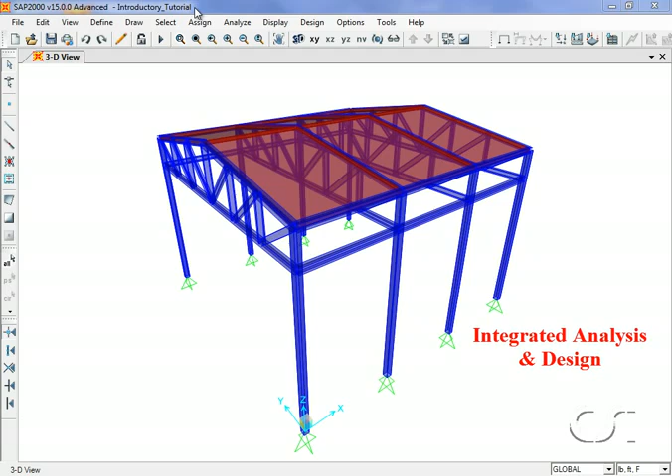Welcome to SAP2000, a comprehensive, yet easy to use, state-of-the-art finite element analysis and design package. In this tutorial, we will create a simple industrial building framed with steel wide flange trusses supported by tube columns, with a concrete roof.

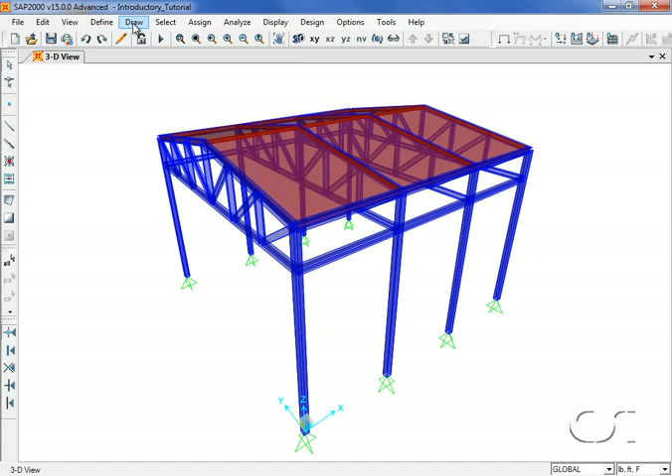Before we get started with modeling, let's take a quick look at the SAP2000 interface. All of the options are available through the top menu bar. Toolbars offer buttons that provide access to commonly used commands, including snaps, zooms, and views. An icon next to a menu command indicates that this item is also available as a one-click button.

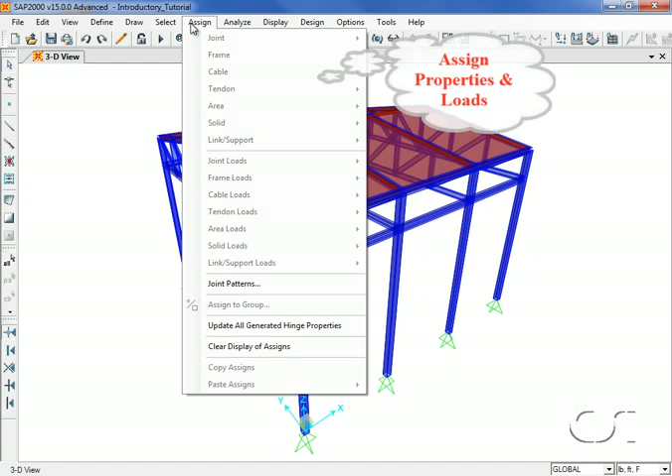Typically, one defines materials and section properties, draws the physical objects, selects the objects, and assigns properties and loads to the objects. The model is then analyzed, followed by design if so desired.

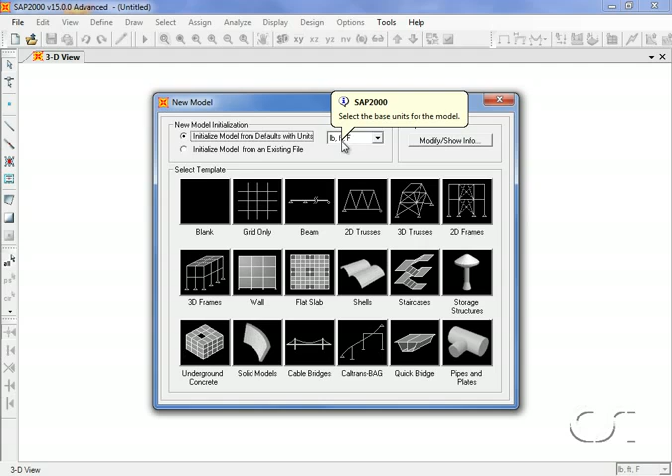We start the process by clicking on File, New Model. Make sure that the default units are set to pound-feet. These are our default units, but any other units may be used while creating the model. SAP2000 offers a wide range of parametric-based templates to help create your models, including 2D and 3D frames that could be used for our building.

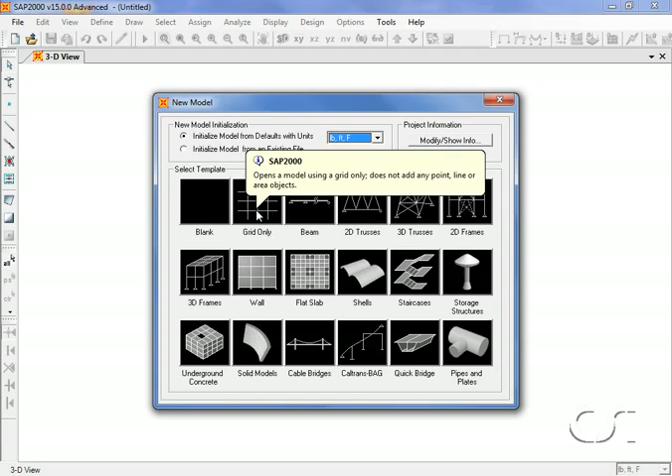However, we will start by using only a grid definition. A thoughtfully planned grid system can result in enormous time savings, so spend some time at the start to make sure your grid captures the main geometrical features of your structure.

Clicking on the grid button, we can now input the number of grid lines, followed by the spacing values. Note that by explicitly specifying the units, we can enter these values in units other than the defaults, and the program automatically handles the conversion.

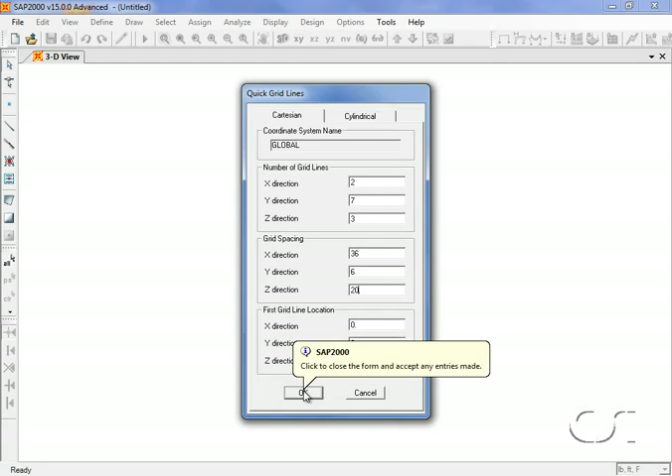The grids appear in two view windows: an XY plan on the left and a 3D view on the right. The number of windows may be changed by using the controls in the top right corner.

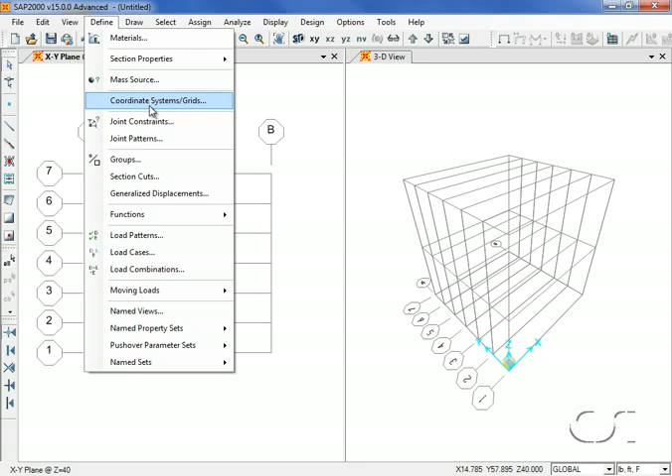Next, we will adjust the height of one of the Z grids. Click the Define Coordinate Systems Grids command, and then the Modify Show System button. In the Z grid data area, enter 24 for the ordinate of the Z3 grid, and then click OK. We have shortened the upper grid spacing.

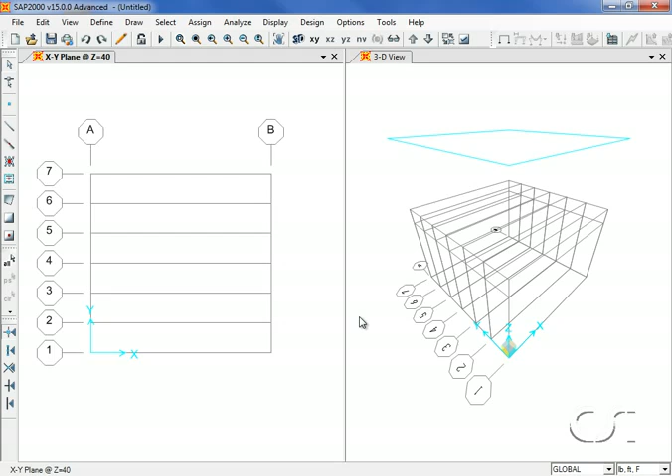Next, we will define the material properties to be used in the model. Click the Define Materials command, and note that two materials are predefined, one for concrete and one for steel. These are appropriate for the concrete roof deck and the wide flange sections, respectively.

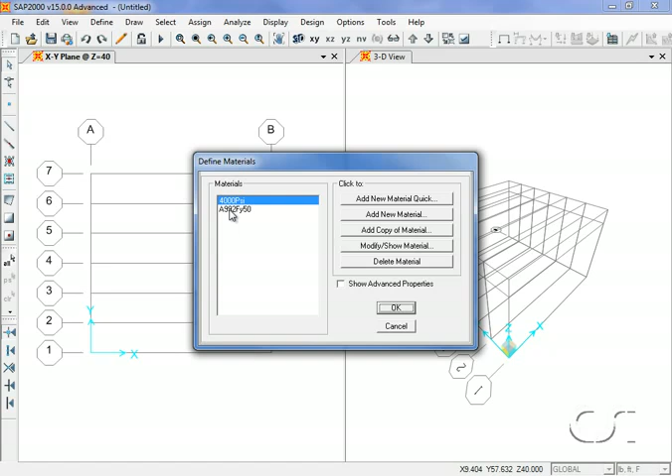We will add a third material property for the steel tube columns. Click the Add New Material Quick button and select Steel from the Material Type drop-down list, and then ASTM A500 Grade B from the specification list. This is all we need to do to define a material when selecting from the predefined standards.

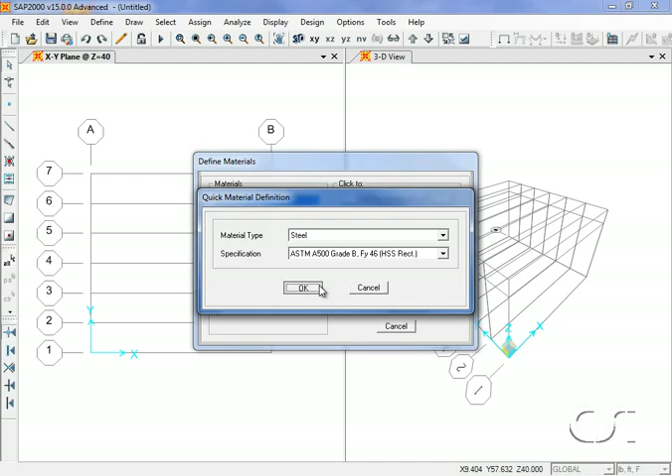Next, we will define the frame section needed for the column objects by clicking on the Define Frame Sections command, and then clicking on the Import New Property button. Verify that steel is showing in the property type list, and then click on the Tube button.

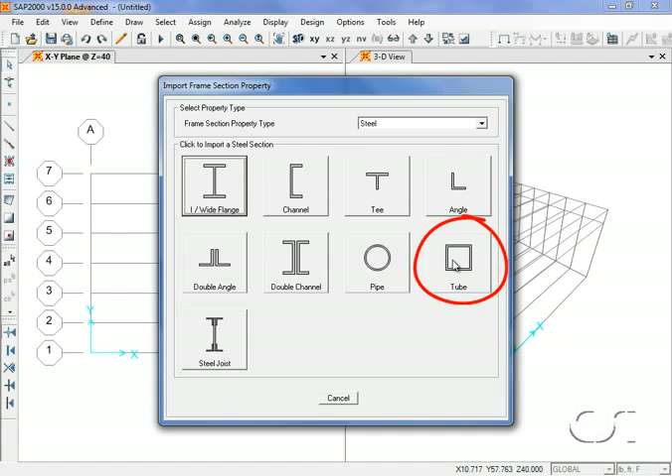Next, we will select and open the section database and select A500 Grade B46 from the material list. Clicking on the plus button allows editing of the material or additional materials to be added. Scroll down the list until you locate the HSS 8x8x3/8 section.

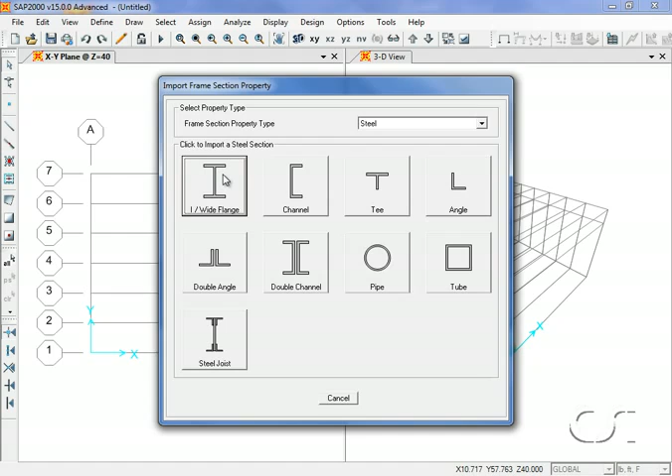Leaving the Frame Properties form open, we will next define the wide flange section properties needed for the trusses. Click the Import New Property button, and this time select the I Wide Flange button. Verify that the A992FY50 material is showing, and scroll down the list until you find the W8x10.

Continue to scroll until you reach the W8x67 section, and select the entire group by holding down the Shift key and the left mouse button simultaneously.

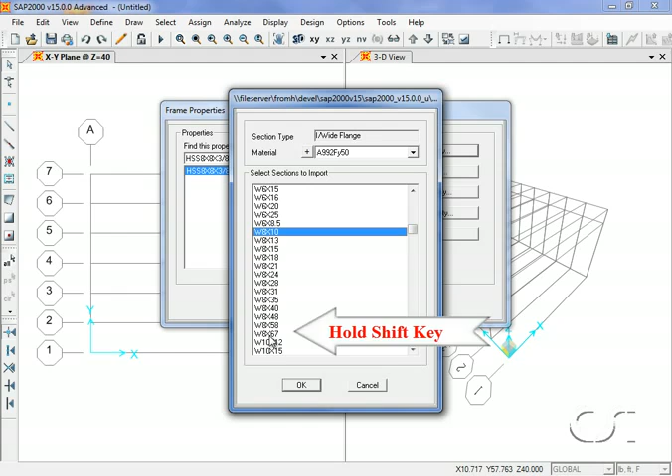Now that these wide flange sections are available to the program, we are going to assign them to an auto-select sections list. This list will tell the program to choose from these sections when analyzing and designing the trusses.

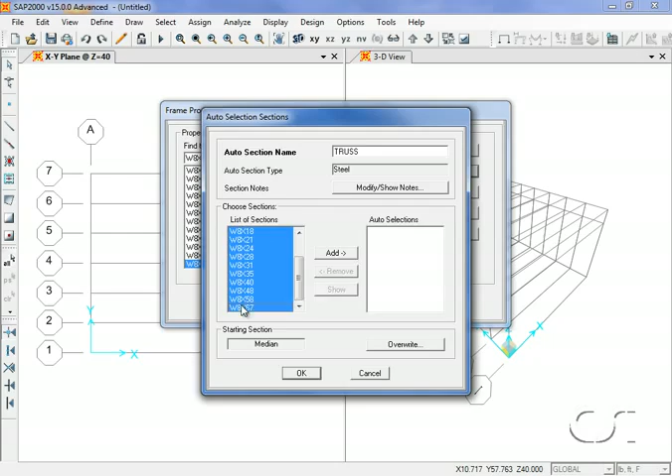Name the list Truss and select all of the wide flanges. The program will use the median section as the starting section in the initial analysis. We can now assign the truss list just like we would an individual section.

Make sure that the left view or XY plan view is active. You can make a view active by clicking anywhere in the window, and you can verify that it is active if the title tab is highlighted.

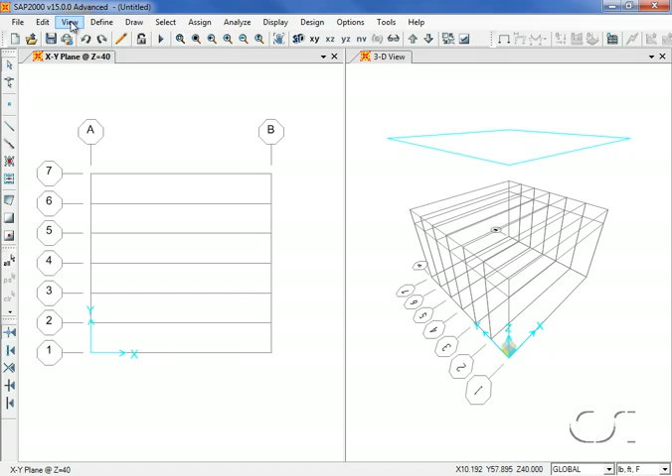Next, click the View menu, Set 2D View command. Select the YZ plane option with X equal to 0 and click OK. This changes the view to a YZ elevation.

Next, make sure that the Snap to Points option is on and click on the Draw Frame icon.

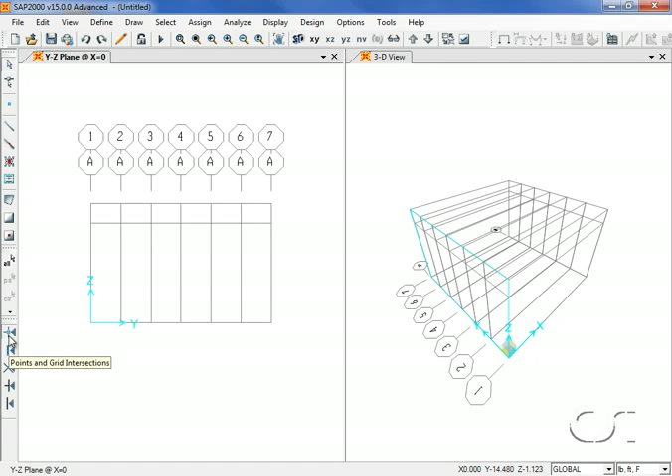We are going to draw the column objects and want the program to assign the HSS 8x8x3/8 sections to the objects. Start by clicking at the origin and then click again at the top of the grid to give a column 24 feet tall. Note that the position of the cursor is given in the lower right-hand corner.

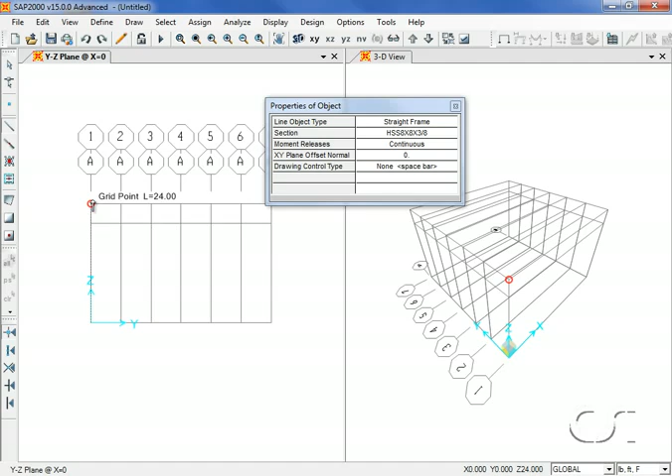A right click will stop the drawing action but leave you in the draw mode. We will repeat the process on the other side to draw another column.

Right-click and return to the Properties of Object form and select Truss from the Section drop-down list. This will assign the Truss Auto-Select list to the truss members we will now draw.

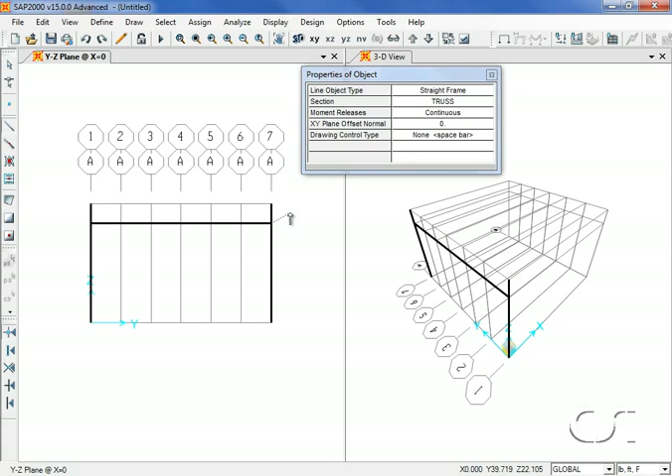We will start by drawing the bottom chord. Note that this chord is drawn as a single physical member. Repeat the process to draw the top chord, which will also be 36 feet long. Next, we will draw the diagonals.

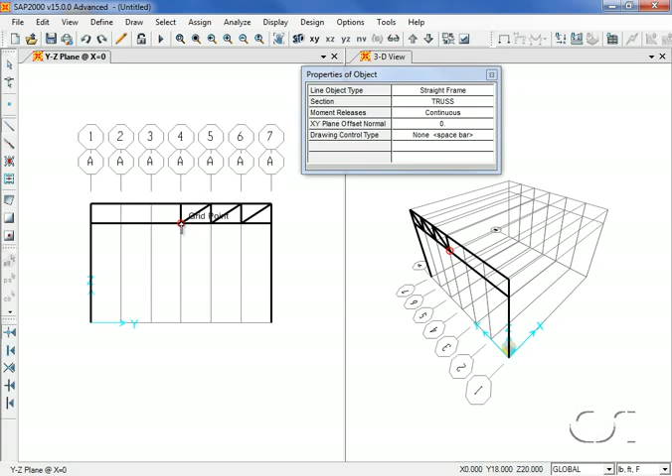After drawing one half, click the right mouse button and continue by drawing the other half. Click the Set Select Mode button to leave the draw mode.

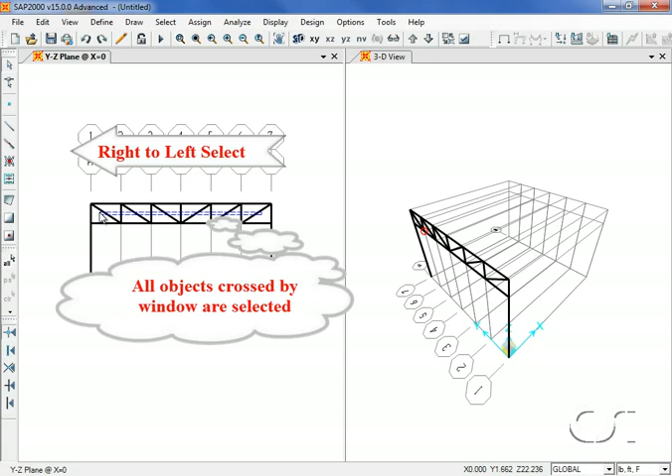Next, we will assign pinned releases to the internal truss members. Select all of the internal diagonal and vertical members by holding down the mouse button and dragging the cursor across the objects right to left. As a general note, when in selection mode, if you window from right to left, everything touched by the window will be selected. However, if you window from left to right, only items completely within the window will be selected.

Click the Assign Frame Releases command and check the start and end boxes for the Moment 3-3 component.

Click the Assign Clear Display of Assigns command to remove the pinned identifiers.

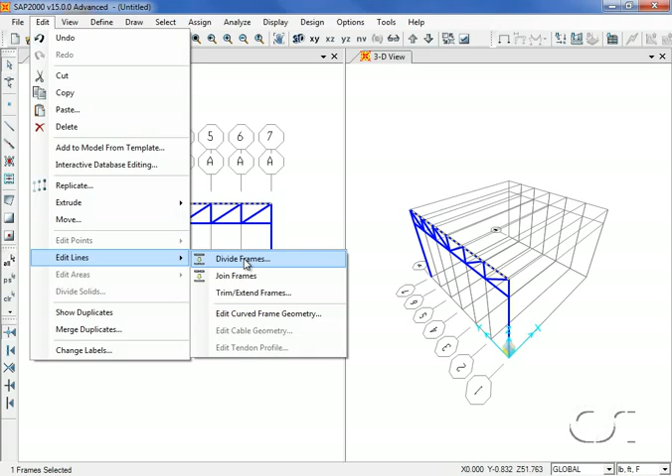Next, select the top chord by clicking on it and go to the Edit, Lines, Divide Frames command to divide the single object into 2 frames. This will allow us to later alter the slope of the top chord.

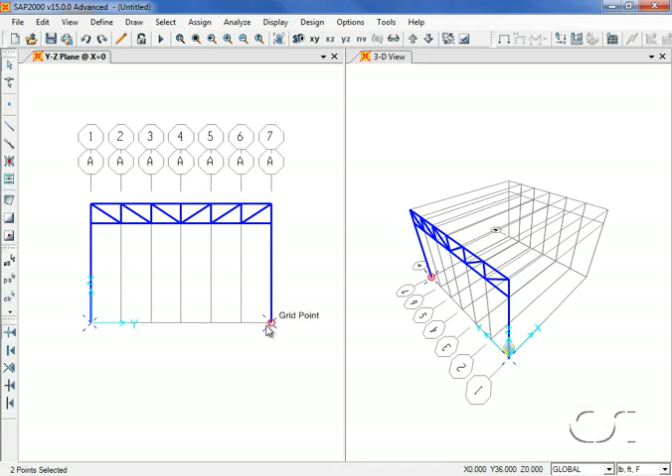In this step, we will define the supports for the columns. We click on the 2 joints that define the bottom of the columns, and then go to the Assign Joint Restraints command. We are going to pin the column supports.

Next, we will replicate the truss frame just drawn at other locations in our model. Click the Select All button to select all objects in the model.

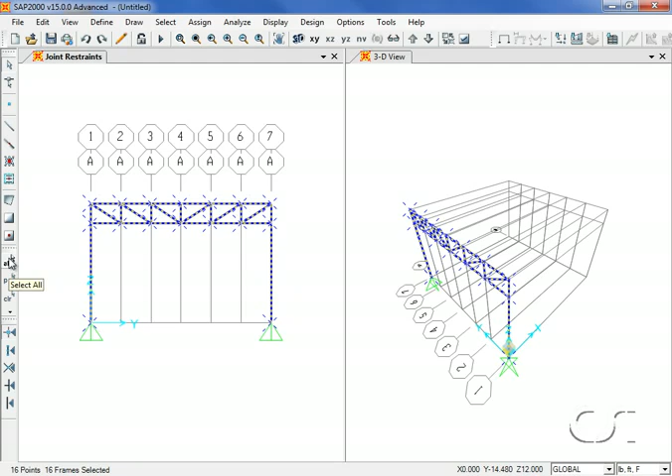Click the Edit Replicate command, enter 12 into the DX edit box, and 3 into the number edit box to replicate the frame at 3 locations at 12 feet on center.

We will next change our view to an XZ planar view so that we can draw longitudinal beam members.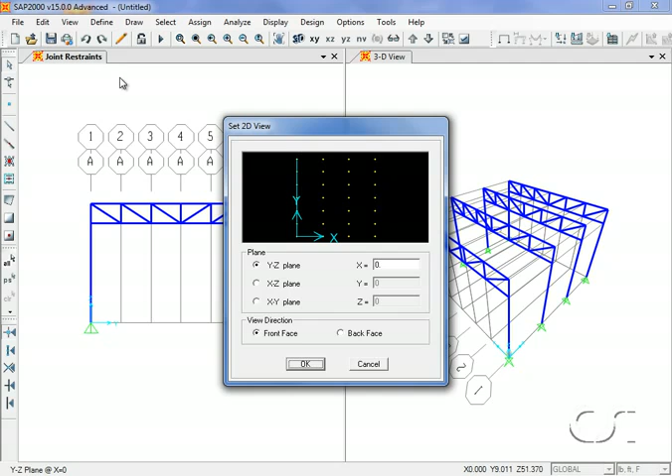We go to the Draw Frame command and select the W8x31 section from the section list. Our first member will be drawn along the top of the frame.

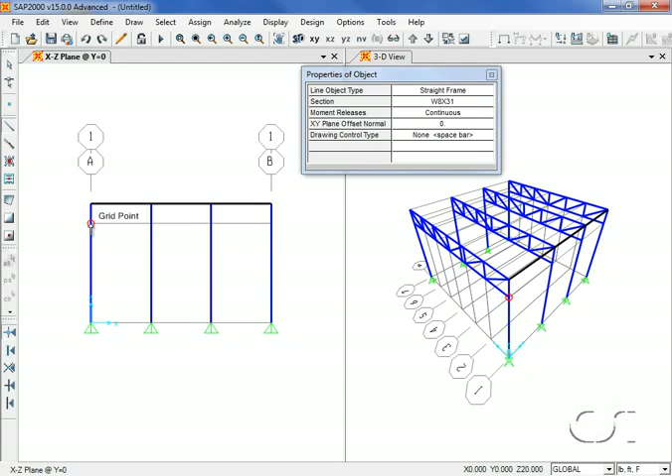We will add another frame object at the next grid level down. Leave the draw mode by clicking on the Set Select Mode button and select the 2 objects just drawn by clicking on them, remembering that they were drawn as single objects.

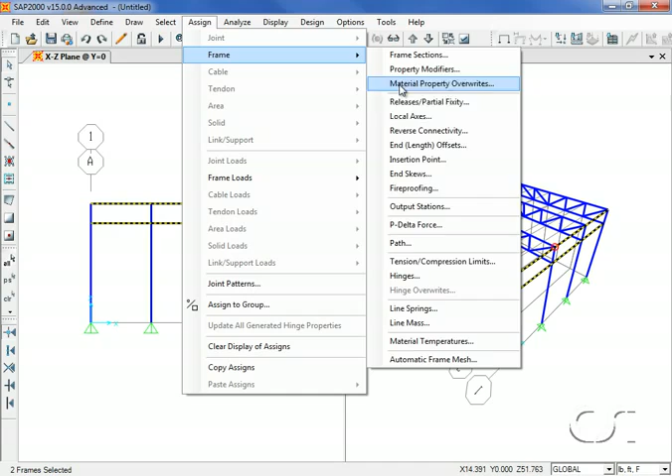This next step will tell the program to internally mesh these members so that they will be connected to all of the elements that frame into them.

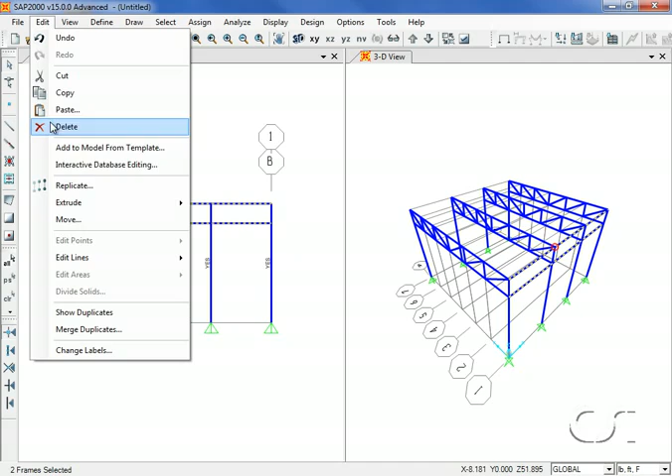Next, we will replicate the beams just drawn at the other side of the building. Select the beams and go to the Edit Replicate command, and set DX equal to 0, DY equal to 36, and the number equal to 1.

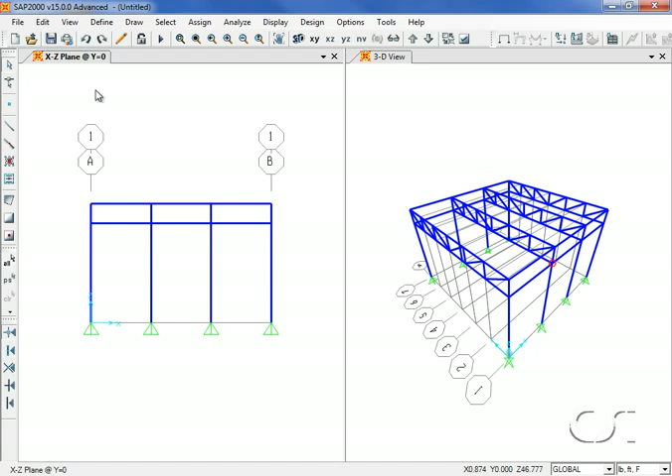Next, we will add the concrete roof deck into the model. Change the left window to an XY plane at Z equal to 24.

And define the concrete deck by going to the Define Area Sections command.

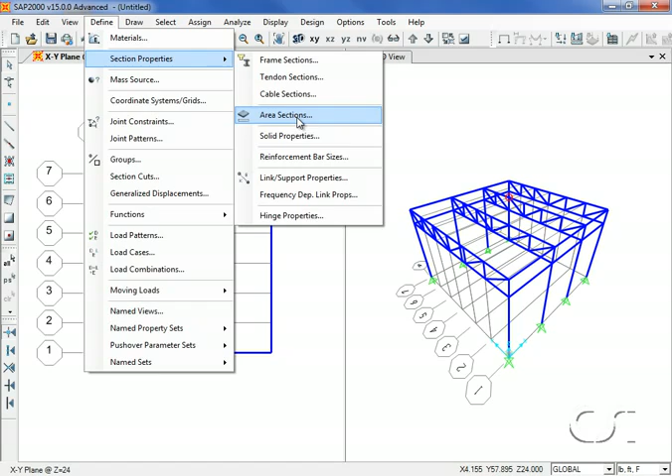We will create a new section called Roof, which will use the default 4000 psi concrete with a thickness set to 5 inches. Notice that by explicitly inputting the units, the program can automatically convert these to the base units of feet.

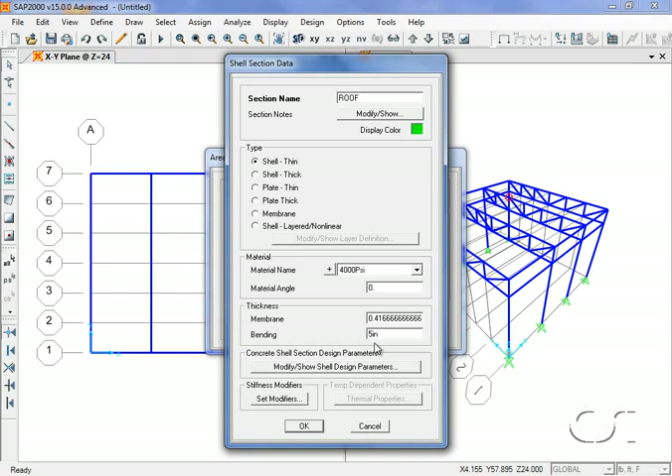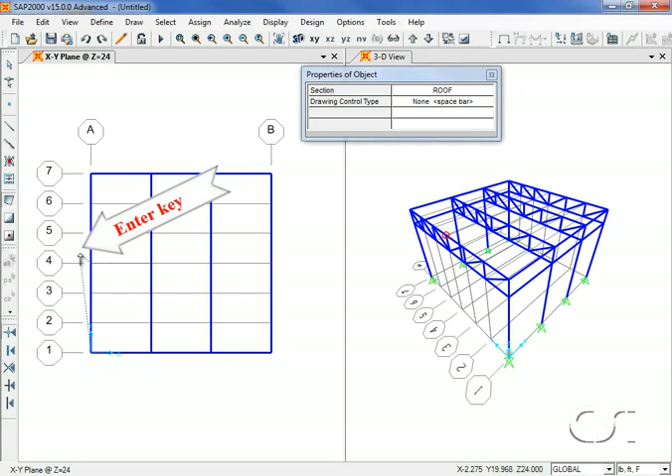Next, draw one of the deck panels by using the Draw Poly Area command. Make sure that the property is set to roof, and then click on the 4 corner points followed by the enter key to define the first roof panel.

Leave the draw mode and click the Set Display Options button. Check the Fill Objects box and the Apply to All Windows box.

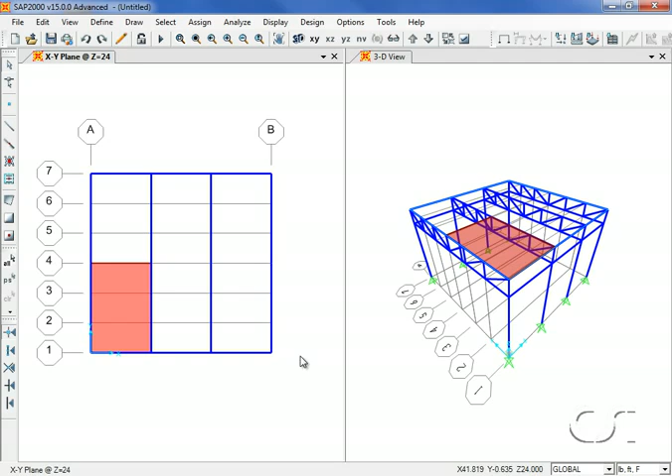To make the model easier to see, we will turn off the grids in the 3D view.

Next, we will mesh the roof panel to ensure connectivity with the supporting frame members. Right-click anywhere on the roof deck to display the Area Information form. Object assignments and loads may be edited directly from this form.

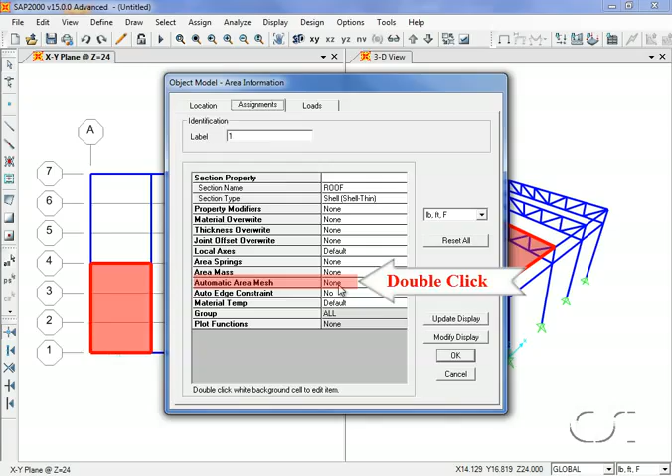Double-click in the Automatic Area Mesh Edit box, and then select the Mesh Area based on Points on Area Edges option. And check the intersections of straight line objects and the Point Objects checkbox.

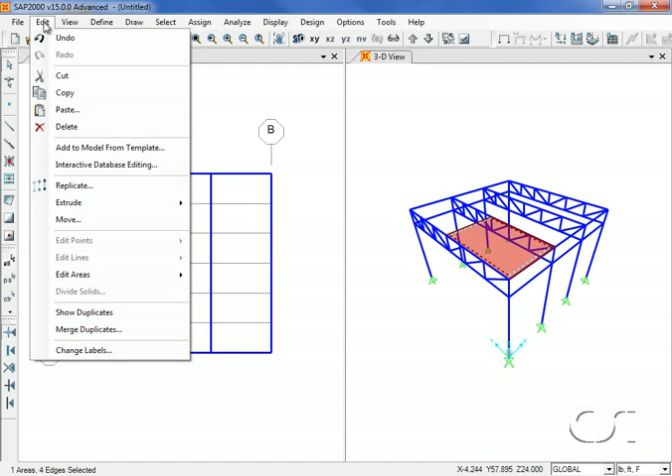Next, we will replicate the roof panel to fill the entire roof area. Select the roof panel by left-clicking on it and note that the selection is shown in the lower left-hand corner. Then go to the Edit, Replicate command. On the Linear tab, type 12 into the DX edit box and 2 into the number box.

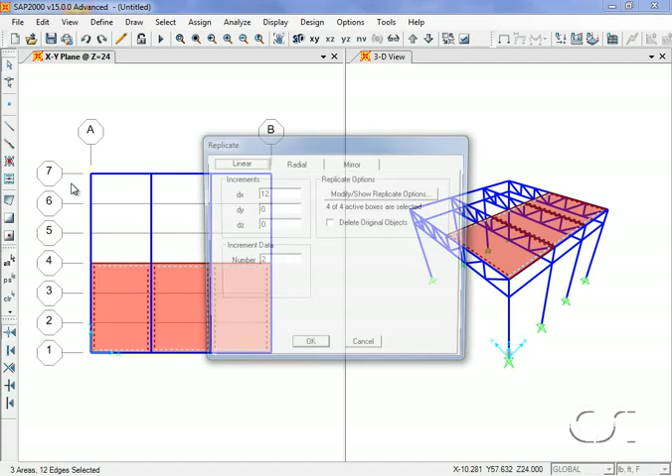Now we select all 3 roof panels and will replicate to the other half of the roof. Next, we will move the roof objects to create the roof slope.

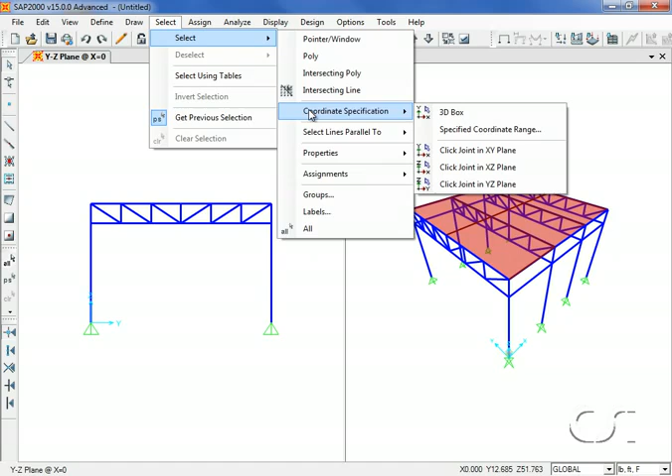We go to the Select, Specified Coordinate Range command, and click the At a Single Value option under the Y coordinate limits. With the operator set to equal, we enter 18 into the value edit box. In the Z coordinate limits area, again select the At a Single Value option, but this time type 24 into the value edit box.

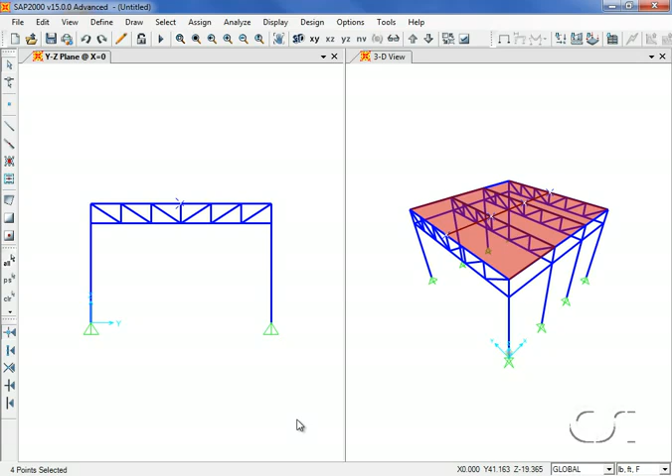This command will select all point objects that lie along the ridge line of the roof. We will move these selected points vertically 3 feet in the up direction. Note that the roof panels have moved up appropriately, but the truss diagonals and verticals need adjustment.

Returning to the Specified Coordinate Range form, we select the Between Two Values option under the Y coordinate limits. For the first operator, we use greater than and set the value to 12. For the second, we use less than and set the value to 24. For these selected joints, we will move them up 2 feet.

For the last truss points, we use values of 6 and 30. These points will be moved up 1 foot.

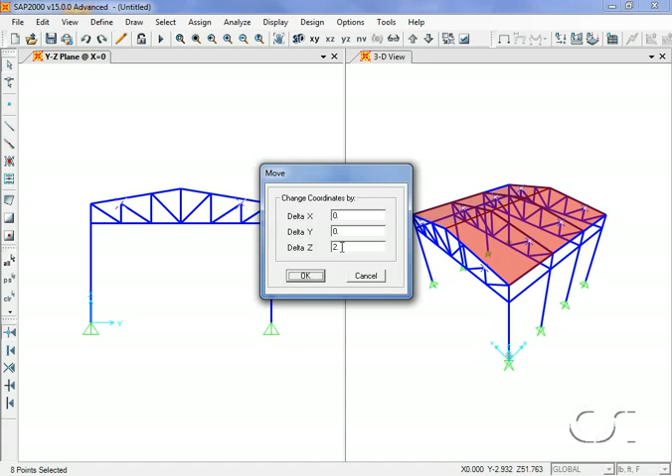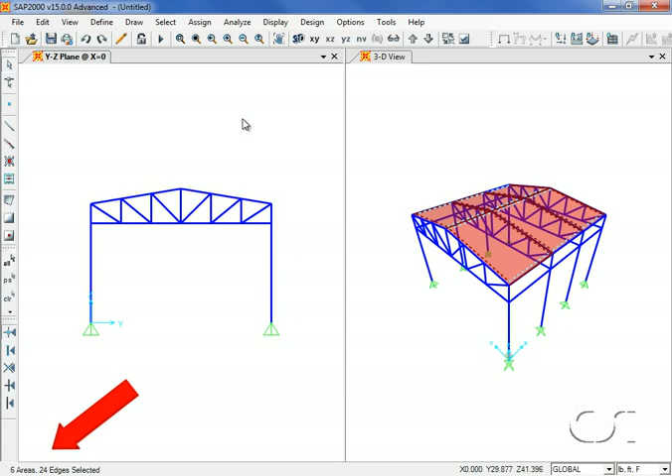Next, we will modify the stiffness factors of the roof area objects so that they will not act as flanges for the top chords of the trusses. Selecting all the concrete roof panels by their material property, we go to the Area Stiffness Modifiers command and enter 0 into the membrane F22 modifier edit box. This prohibits in-plane axial loads.

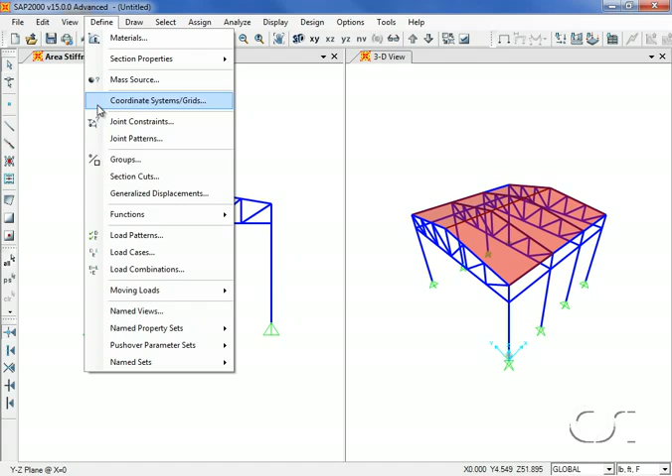A check of the default load patterns shows that we have one pattern, dead load, with self-weight included. We will now add load patterns for live load and wind load.

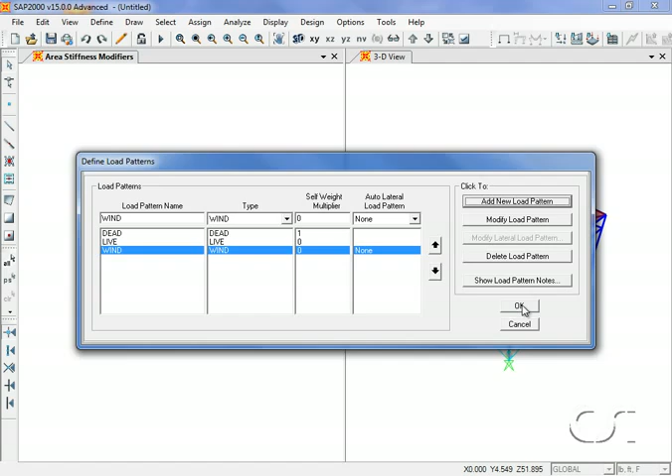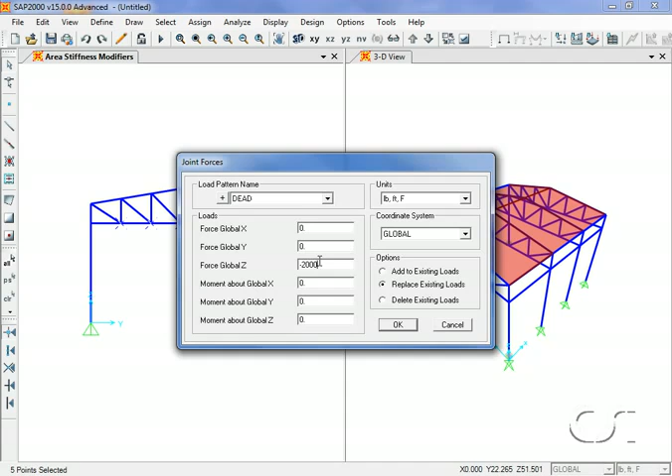Now we will assign loads. Start by selecting the panel points along the bottom chord and go to the Assign, Joint Loads, Forces command. For the dead load pattern, we will apply joint loads of 2000 pounds in the down, or -Z, direction. These are in addition to the self-weight of the structure.

Repeat the selection process using the Get Previous Selection button, and replicate the load at the other trusses.

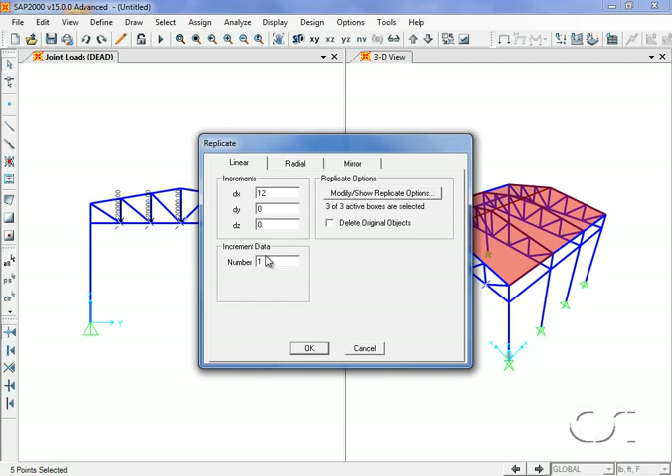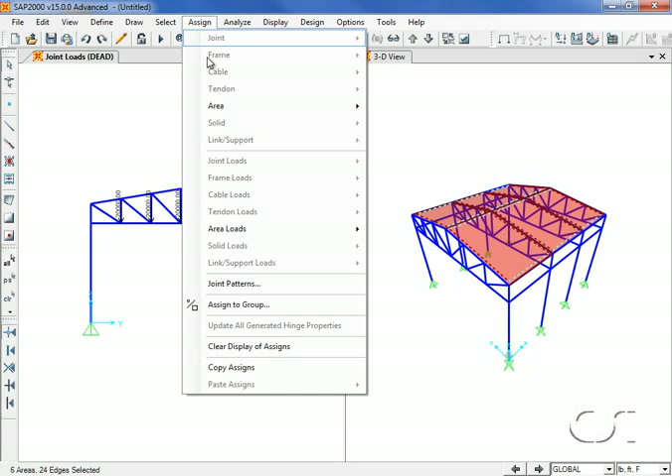Next, we will apply a live load to the roof panels. Select the roof area objects by section property and go to the Assign, Area Loads, Uniform command. Here, we will input a uniform live load of 30 pounds per square foot in the gravity projected direction.

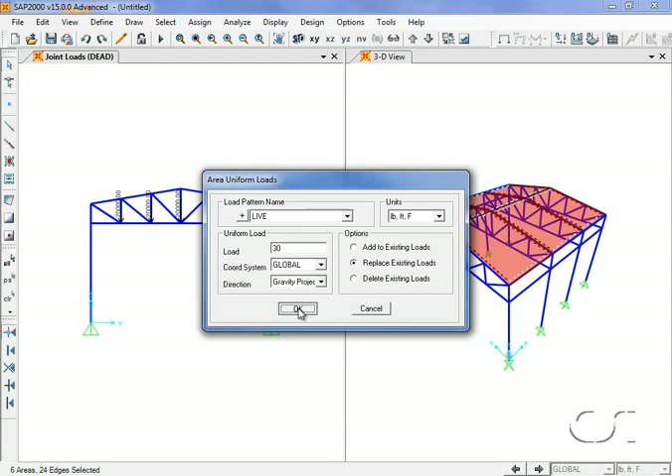Next, we will apply wind loads. Different loads will be applied on the windward and leeward sides of the roof. We will start with the windward load and select the roof area objects using the Specified Coordinate Range command. We uncheck all the options except for area.

The load will be applied as a surface pressure of 15 pounds per square foot to the top face.

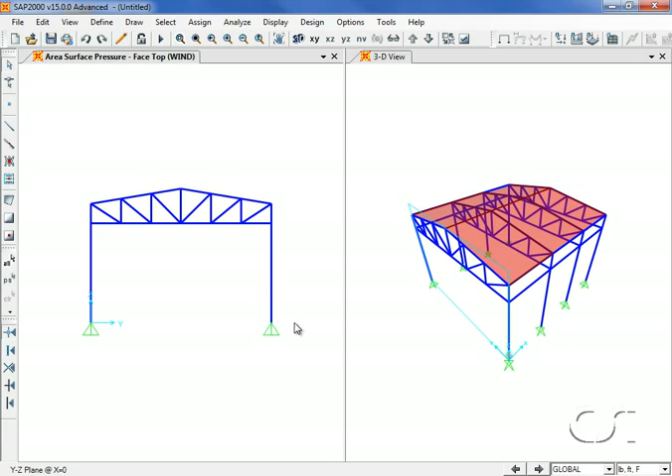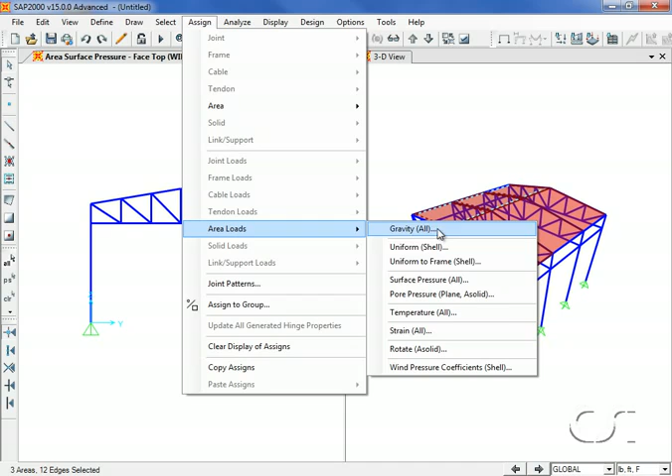Now we will select the area objects on the other side of the roof and assign a surface pressure of -6 pounds per square foot. This results in an outward pressure on the leeward side.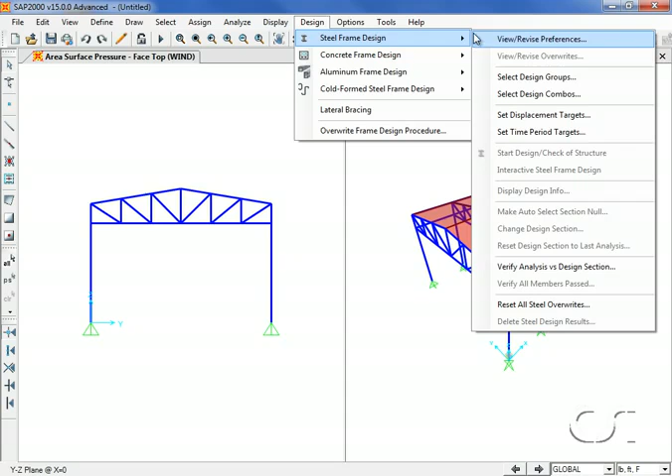Next, we will select a design code and set up load combinations. We will use the AISC 360-05 design code for our steel members. For the combinations, we will let the program automatically generate our combos based on the selected AISC code.

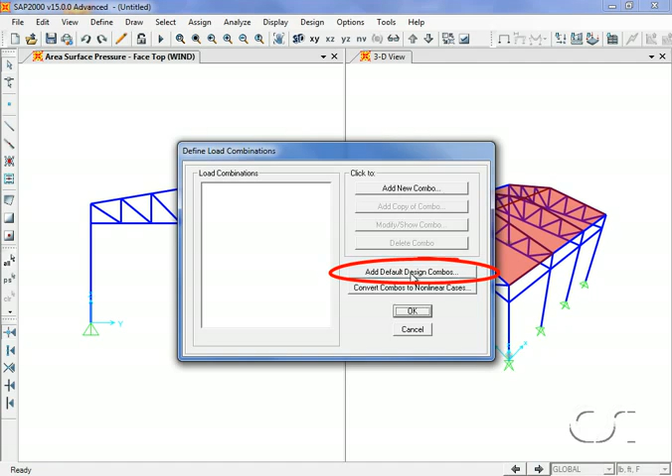Clicking the Add Default Design Combos button, we will uncheck the deflection checkbox. For this model, we are concerned only with strength limit states.

Note that 6 load combinations have now been generated. We can review these by selecting and clicking the Modify Show button.

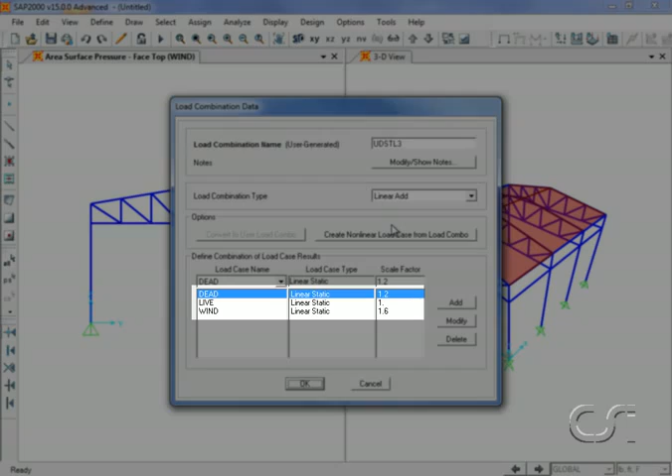Note that the third combination is 1.2 dead plus live plus 1.6 wind, while the fourth is the same, but with wind applied with a negative factor.

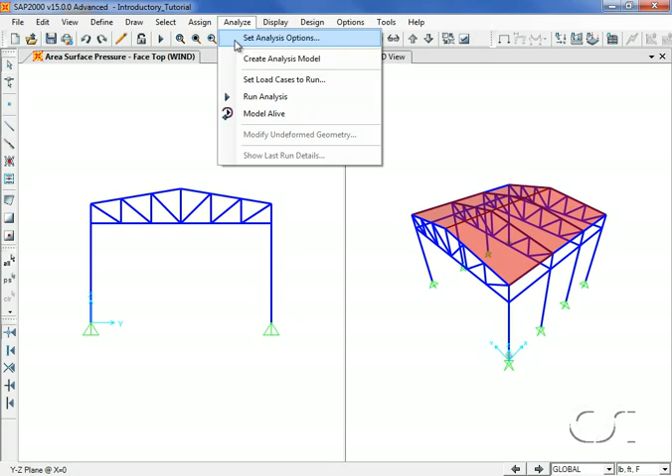The model is now complete and we are ready to analyze the model. Click on the Analyze Run Analysis command and set the modal case to Do Not Run, as we wish to do a static analysis only.

Click on the Run Now button. After the analysis is complete, the active window is updated with the deformed shape.

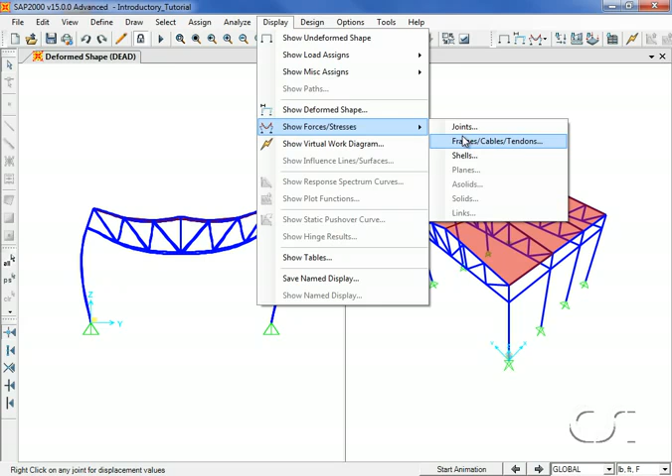Make sure the left window is active and click on the Display Show Forces command and select Frames. Here you can choose the load case and type of force to be displayed. A right mouse click on an individual member will bring up detailed force diagrams for that particular member.

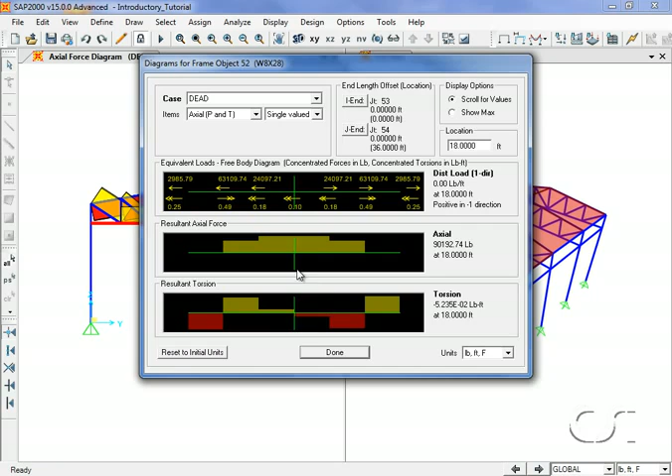Next, click on the Display Show Deformed Shape command. Similar to the forces, a right mouse click on a joint will display the displacements for that particular location.

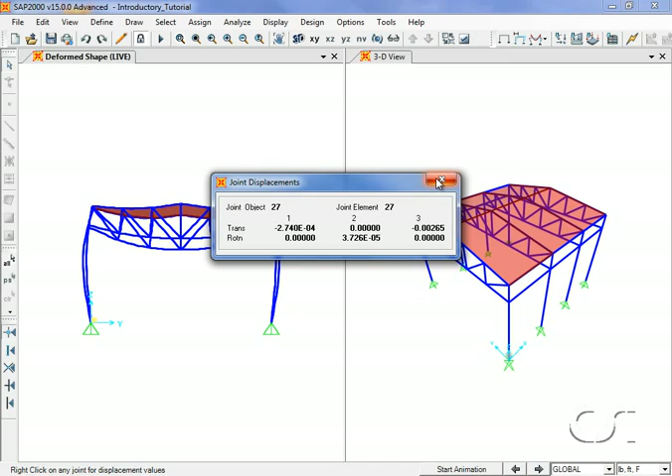We are now ready to start the design phase. Returning to the design menu, we will again select the View Revise Preferences command for steel frame design. Here we previously set the design code to AISC 360-05, but this form is also where other design parameters can be controlled. It is always a good idea to review these before starting a design.

Next, go to Design, Steel Frame Design, and click on the Start Design of Structure command. After the design is complete, the design sections are displayed.

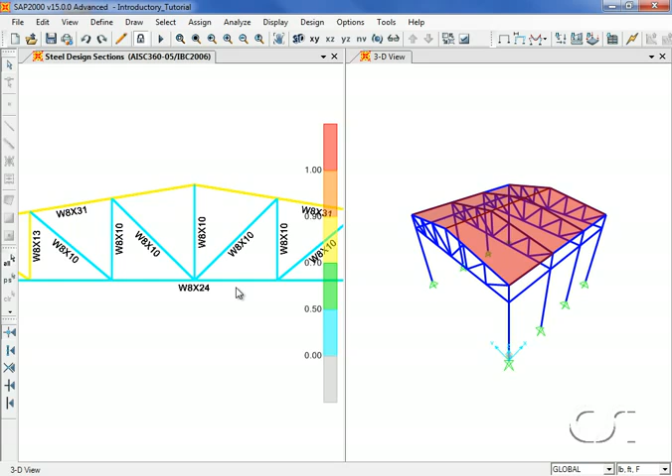If we window in, we can see that the program designed the bottom chords as single objects, even though for analysis they were meshed into smaller elements.

A right mouse click on a design member will bring up stress check information, including the governing load combination.

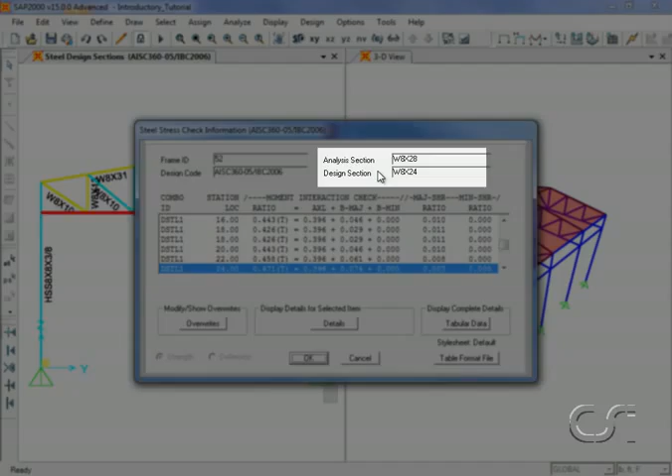Note that the design section differs from the analysis section, so another analysis should be run, iterating until the two sections are the same. Clicking on the Details button brings up a calculation sheet with all of the pertinent design values.

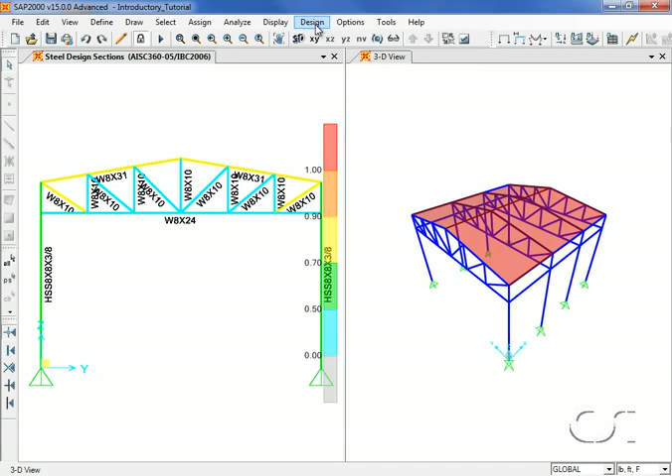Having run the analysis and design several additional times, as a last step, one should check that the design and analysis sections match by clicking on the Verify Analysis versus Design Section command. One should also check that all members pass the stress check.

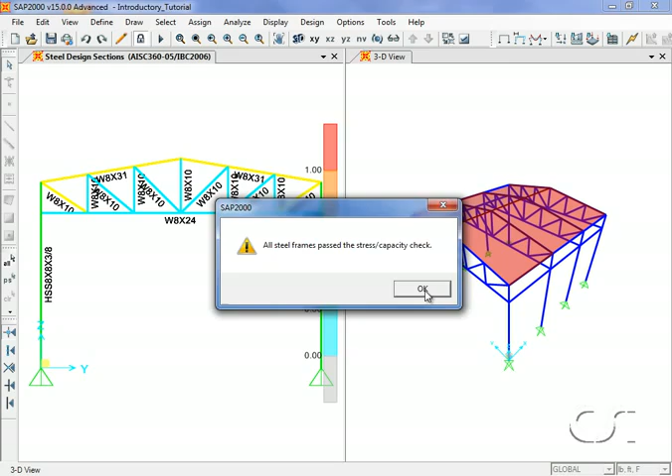This concludes this tutorial.